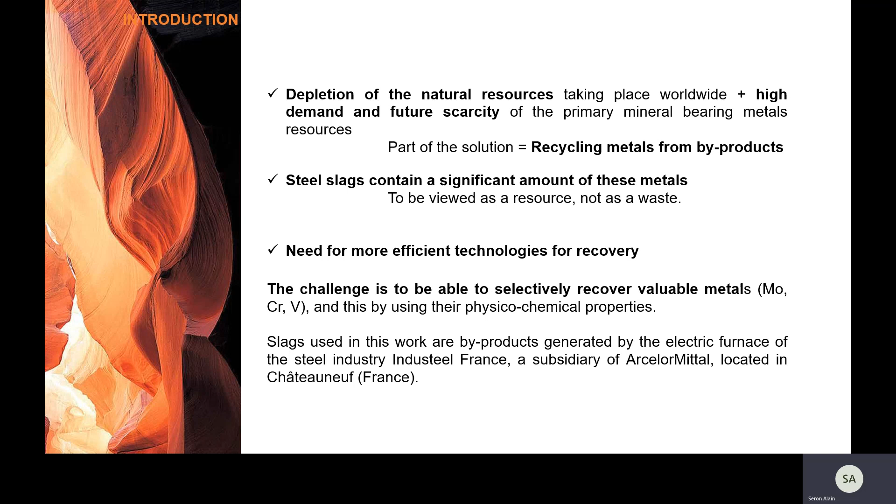The challenge is to be able to selectively recover valuable metals, molybdenum, chromium, vanadium, by using their physico-chemical properties. Slag used was produced by the electric furnace of the steel industry Industeel France, a subsidiary of ArcelorMittal located in Châteauneuf, France.

For many years, the slag produced on the Châteauneuf site and nearby was stored in situ, generating an important deposit of more than 10 million tons. The HYPASS project tried to secure the deposit of historical slags, but also to enhance those produced today.

In this presentation, we are going to focus on the valorization of today produced EAF slags by recovery of chromium, molybdenum, and vanadium metals using hydrometallurgical routes.

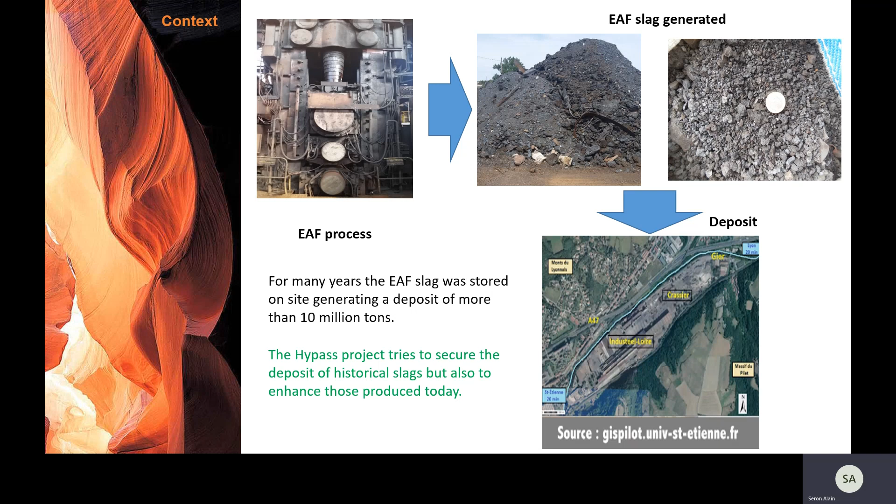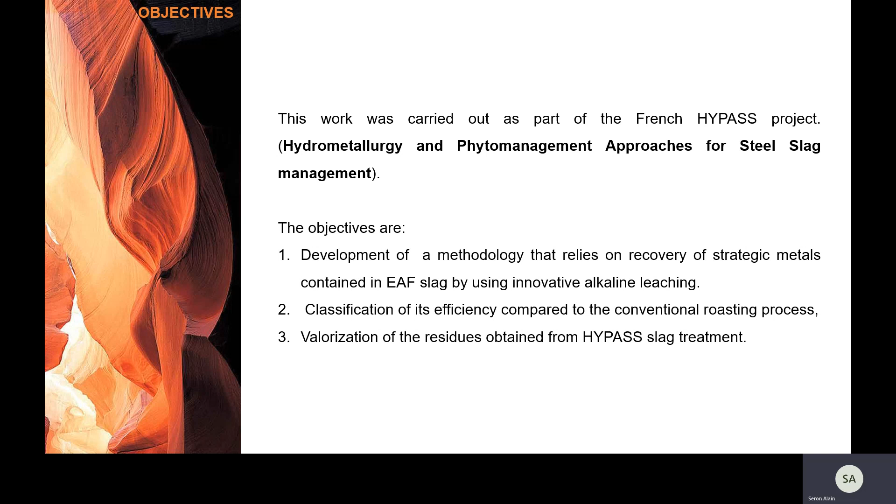This work was carried out as part of the French HYPASS project dealing with hydrometallurgy and phytomanagement approaches for steel slag management. The objectives are first, development of a methodology that relies on recovery of strategic metals contained in EAF slag by using innovative alkaline leaching. Second, classification of its efficiency compared to the conventional roasting process. Third, valorization of the residues obtained from HYPASS slag treatment.

The methodology used in this work is summarized on this scheme with three main steps. The first one consists in pre-concentration and pre-treatment of slag to make it more reactive in alkaline media. This step includes grinding and magnetic separation to recover iron scraps.

The first treatment was completed to less than 125 micrometers particle size before co-grinding of slags with reagents, among which sodium hydroxide, potassium hydroxide, sodium carbonate, or potassium carbonate, or a mixture of both carbonate and hydroxide of sodium or potassium.

The second one includes roasting of co-ground mixtures of slag and reagent in order to induce modification of chemical compounds included in slag. Such modification is necessary to obtain leachable metal species, and finally, the third step deals with metal extraction from leaching solution by layered double hydroxide solids, which are able to trap reversibly and selectively metal anions in their interlamellar space.

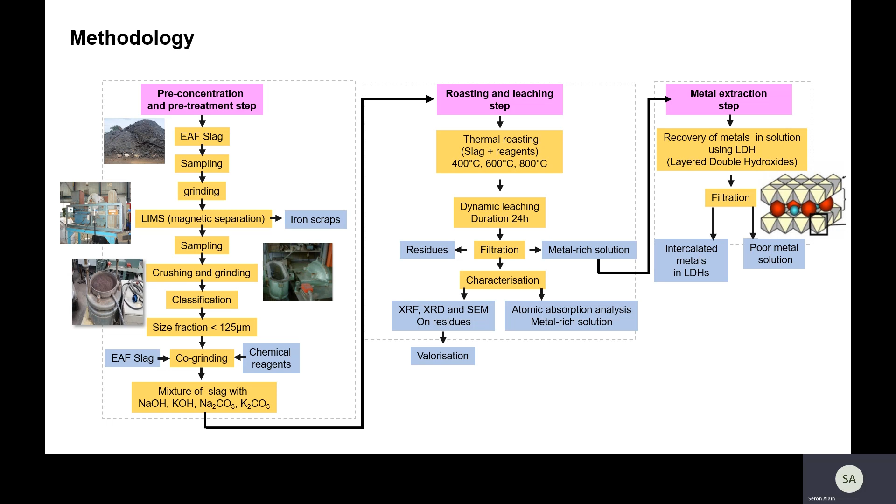Before performing thermal treatment and hydrometallurgical steps, the slag material was first characterized in order to know its chemistry and its chemical reactivity. Here is the chemical composition of the slag sample obtained by X-ray fluorescence analysis. The main elements are iron and calcium, and then silicon, aluminum, and manganese.

But it is important to note that chromium content is 3.4%, vanadium content is close to 1,500 ppm, while molybdenum content is more than 150 ppm. Such amounts justify the interest in these slags.

The main crystalline phases determined by X-ray diffraction analysis are larnite, a calcium silicate, wüstite, an iron oxide, and srebrodolskite, a calcium ferrite. X-ray diffraction analysis also shows that chromite is contained in the studied EAF slags.

Considering iron, Mössbauer spectroscopy clearly shows that more than 50% of iron is paramagnetic. Such characteristics confirm it could be possible to recover a high fraction of iron by magnetic separation.

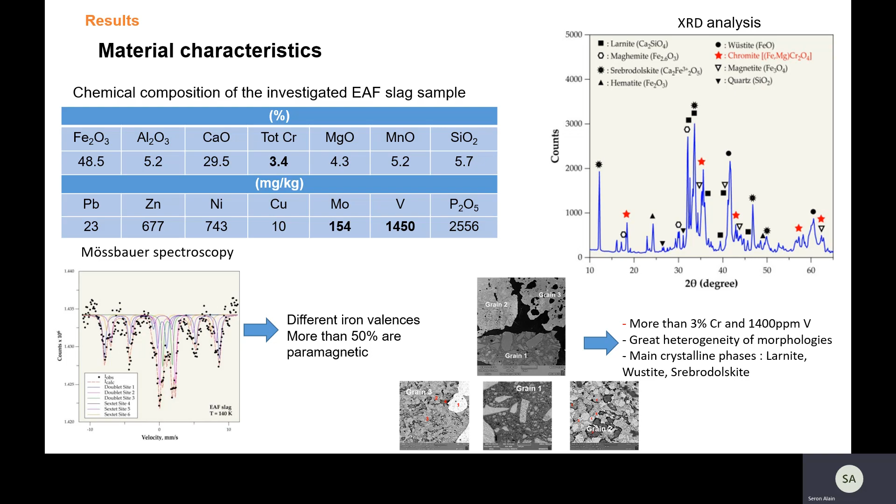Moreover, thermodynamic calculations were done at 400 degrees C and 600 degrees C using HSC software to predict the nature of the products formed by reaction of the different alkaline reagents with the slag at those roasting temperatures.

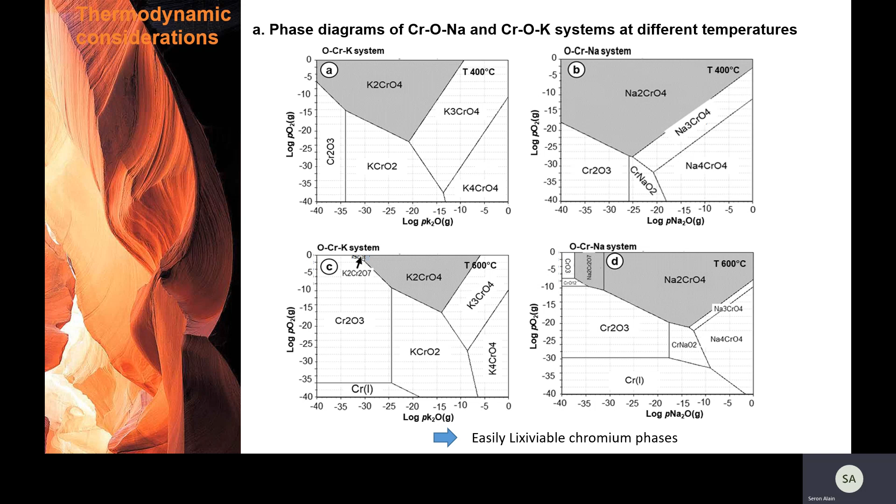The area of formation of sodium and potassium chromates, which are water-soluble phases, tends to decrease and shift to the high partial pressure area of sodium oxide and potassium oxide as the roasting temperature increases.

All the collected information seems to confirm that treatment of slag with the chosen alkaline reagents allows obtaining a water-soluble compound containing the targeted metals. Such high solubility in aqueous media should be an important element to facilitate recovery of such metals.

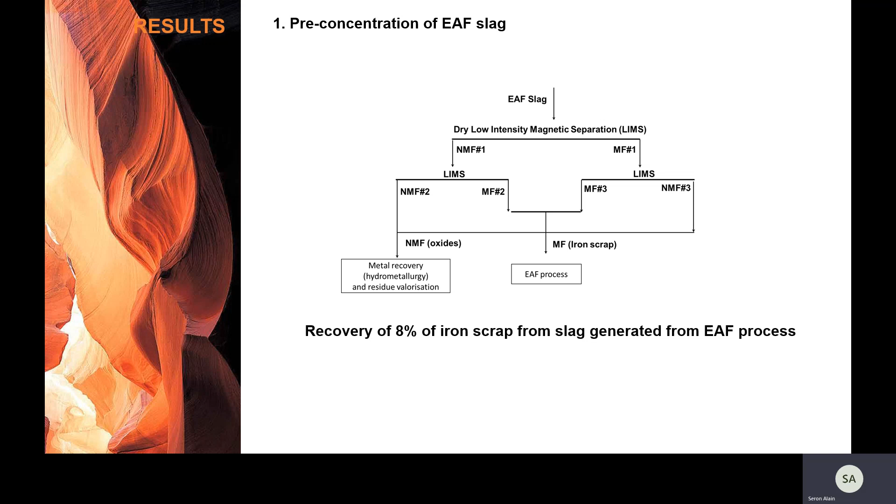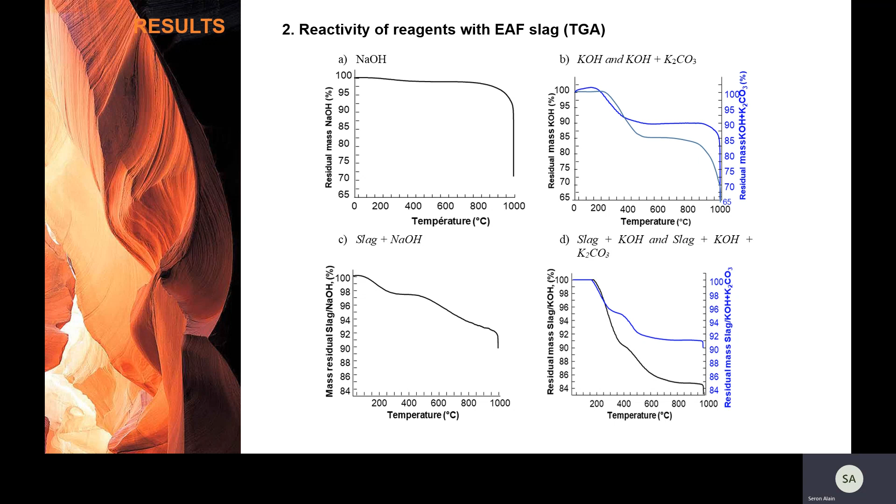As mentioned previously, the applied process is composed of several stages. The first one consists of co-grinding of slag and alkaline reagent to aid generating leachable compounds through roasting. The duration of co-grinding was studied to appreciate the influence of such parameters. The study of the influence of this parameter, like the study of all parameters for most of the different stages of this process, was evaluated with regard to the leaching performance of the targeted metals, all the other influence parameters being kept constant.

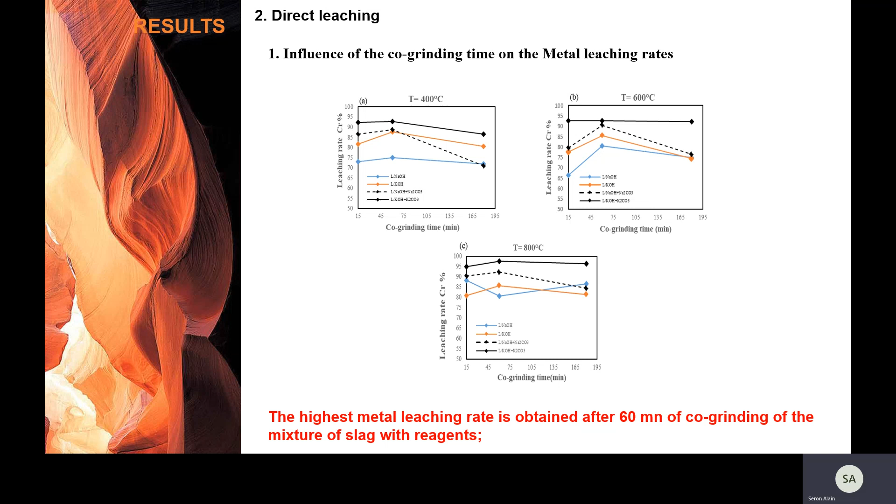It appears that beyond 15 minutes, the co-grinding time has a moderate influence on the leaching performance of the targeted metals. However, the highest leaching rate is obtained after 60 minutes of co-grinding of slag with alkaline reagent.

The influence of roasting temperature at 400, 600, and 800 degrees C on the leaching rate of chromium, molybdenum, and vanadium was studied for pure alkaline reagents and mixtures of hydroxide and carbonate reagents. The chromium leaching rates as a function of roasting temperature for the various alkaline reagents used at different co-grinding times are presented on this slide. These graphs show the mean value obtained from the analysis carried out on triplicate tests.

The rate of chromium leaching tends to increase as a function of the roasting temperature. This increase is more apparent for slag co-ground with sodium hydroxide or a sodium hydroxide–sodium carbonate mixture than for slag co-ground with potassium hydroxide or a mixture of sodium hydroxide and sodium carbonate. However, the best chromium leaching rate, more than 97%, is observed for the slag co-ground with the sodium hydroxide–sodium carbonate mixture for 1 hour and heat treated at 800 degrees C during 2 hours.

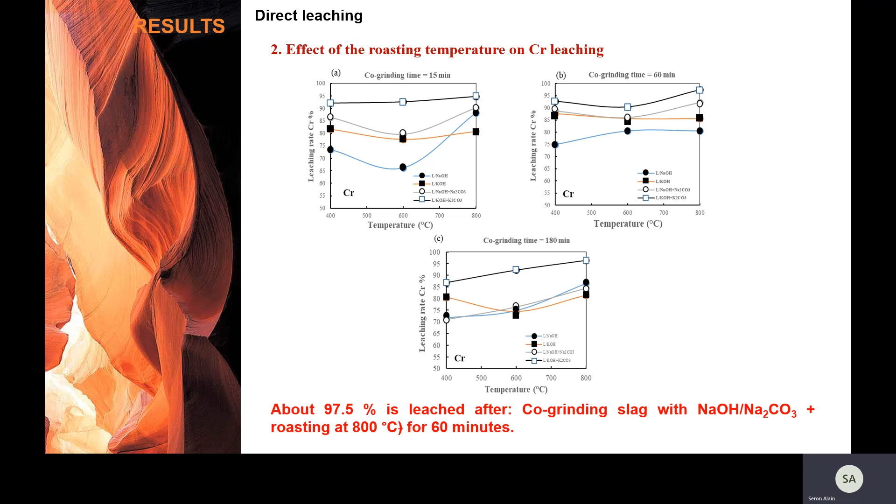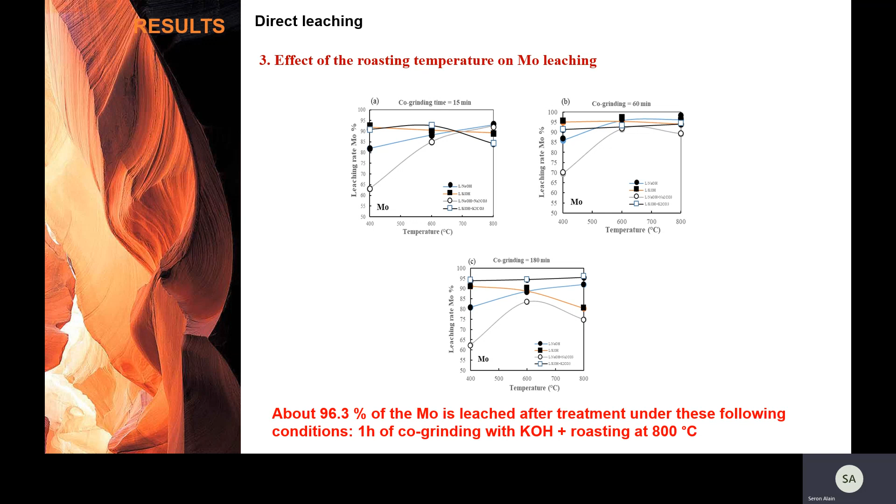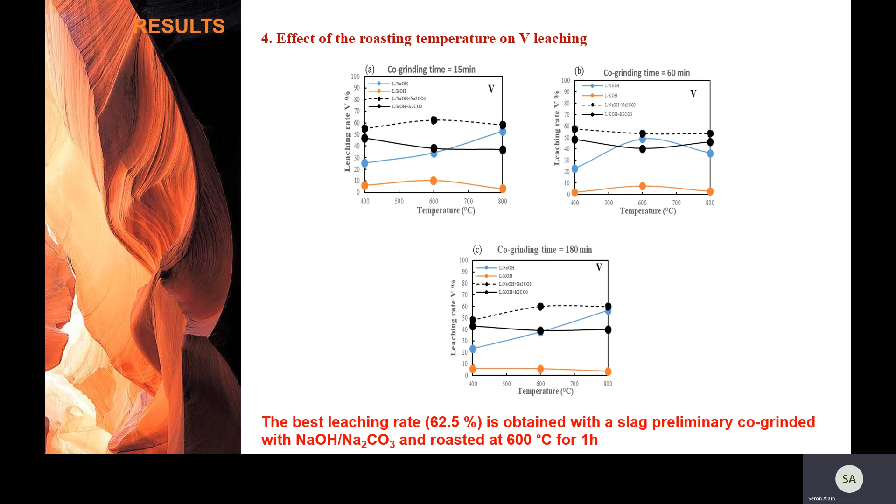Similar observations were made regarding molybdenum recovery. About 96% of the molybdenum is leached after co-grinding with potassium hydroxide during 1 hour and then roasting at 800 degrees C during 2 hours. Considering vanadium, the best leaching rate is higher than 62%. It is obtained after co-grinding of slag with the sodium hydroxide–sodium carbonate mixture during 3 hours and then roasting at 600 degrees C during 2 hours.

As previously mentioned, the recycling of industrial waste containing valuable compounds such as metals, oxides, and hydroxides has become a major concern given the growing economic interest in the recovery of these metals. From this study, it should be remembered that EAF slag contains close to 50% of iron as iron oxide, more than 3% of chromium, 30% of calcium as calcium oxide, 6% of silicon as silicon oxide, 5% of aluminium as aluminium oxide, and other metals in ppm.

The main crystalline phases identified by X-ray diffraction are larnite, Srebrodolskite, magnetite, maghemite, wüstite, and magnesiochromite. TGA results clearly demonstrate the reactivity of alkaline reagents mixed with slag when treated above 400 degrees C. Consequently, the roasting temperatures chosen in this study are 400, 600, and 800 degrees C.

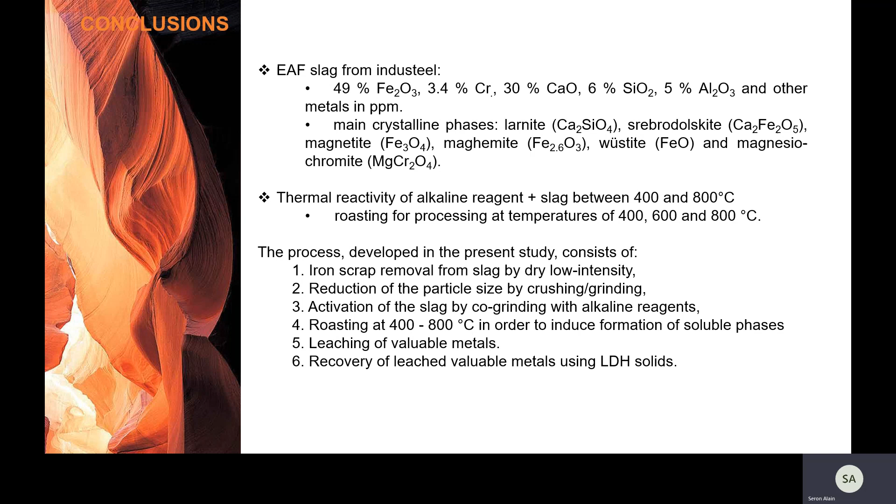Best results obtained for chromium, vanadium, and molybdenum leaching rates are summarized in this table. The best chromium leaching rate, 98%, was observed after co-grinding of slag with a mixture of sodium hydroxide and sodium carbonate, and roasting at 800 degrees C during 1 hour. The best molybdenum leaching rate, 96%, was obtained after co-grinding of slag with potassium hydroxide and roasting at 800 degrees C during 1 hour, while vanadium leaching is no more than 62% in the best tested condition.

For the future, leaching kinetics monitoring has to be considered to minimize the leaching time of the metals. Finally, the capture test of metal anions, chromate, vanadate, molybdate, from the leachates will soon be extensively carried out with LDH solids, which are known to be very efficient anion trapping agents. The obtained results seem promising in terms of efficiency, but it remains to validate the profitability of the complete process in the ongoing project.